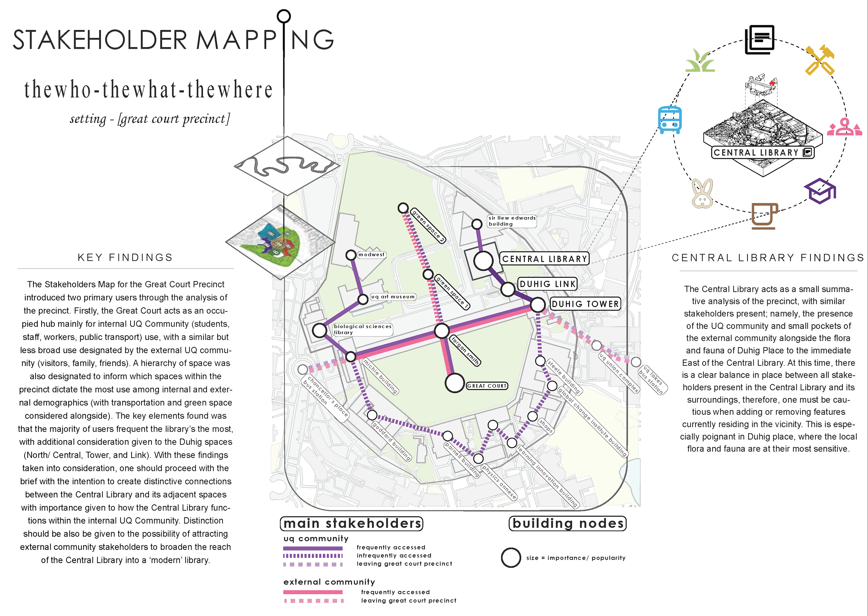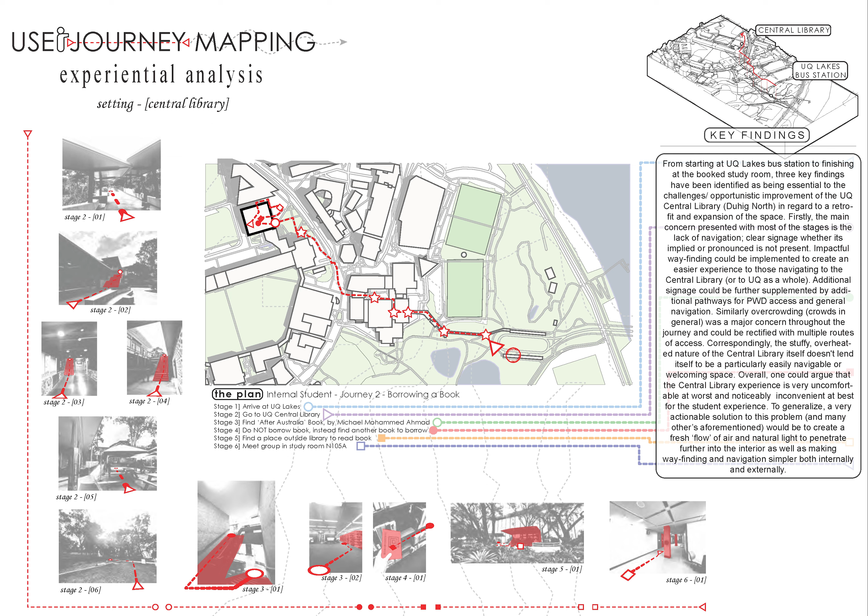To begin, I would be remiss to overlook the research I had conducted for the previous assessment piece involving 4 separate analysis pieces, whose findings will then help determine the new layout of the current assessment piece. Firstly, the analysis of the Great Court Precinct and its stakeholders through a mapping project was done to understand the primary user base of the Central Library and the nearby areas. A user journey map was also created to help understand the user experience of the site and current building layout. Tasks were given to be followed to meet an end goal with 3 other group members, with each of us giving a separate account of our experiences.

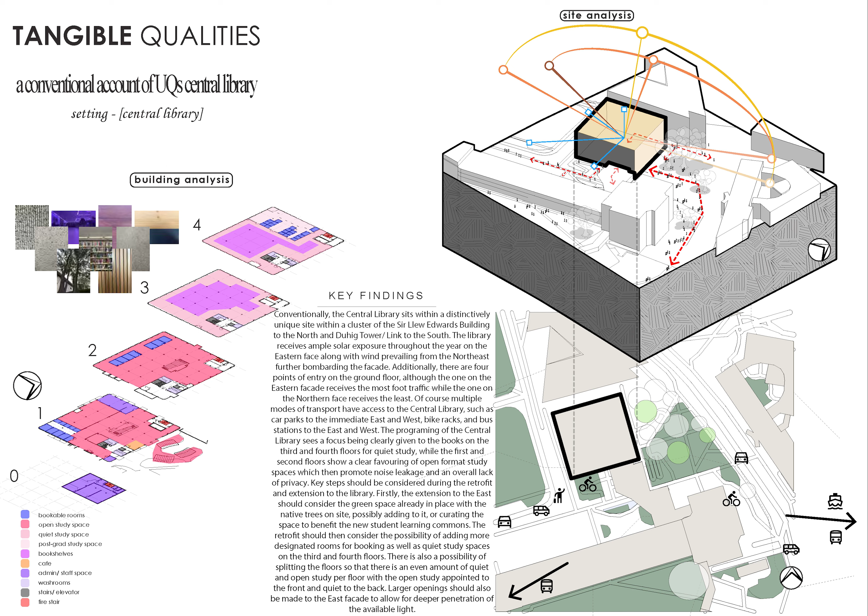Additionally, conventional building analysis was conducted, highlighting the use, materiality, and general orientation of the site and its surrounding environment. And intangible qualities were also considered, such as user experience and indirect environmental factors, such as the loss of navigation, comfort, views, and privacy. Summatively, I found that 6 key findings came from my research. For one, that the Central Library is lacking in natural light, positive user navigation, and open desk space. 2, Central Library must assert itself and maintain a connection to all of its users, both current and potential.

Number 3, levels 1 and 2 only fail to meet a general functionally user-compliant level due to having no overflow levels, which will be alleviated through the removal of the bookshelves in levels 3 and 4. There's little separation between single and group work areas, which leads into similar issues between private and public spaces. And the eastern facade receives large amounts of sunlight, yet this is not felt in the interior spaces. And finally, the far eastern floor of the building contains very few users, despite spaces being available.

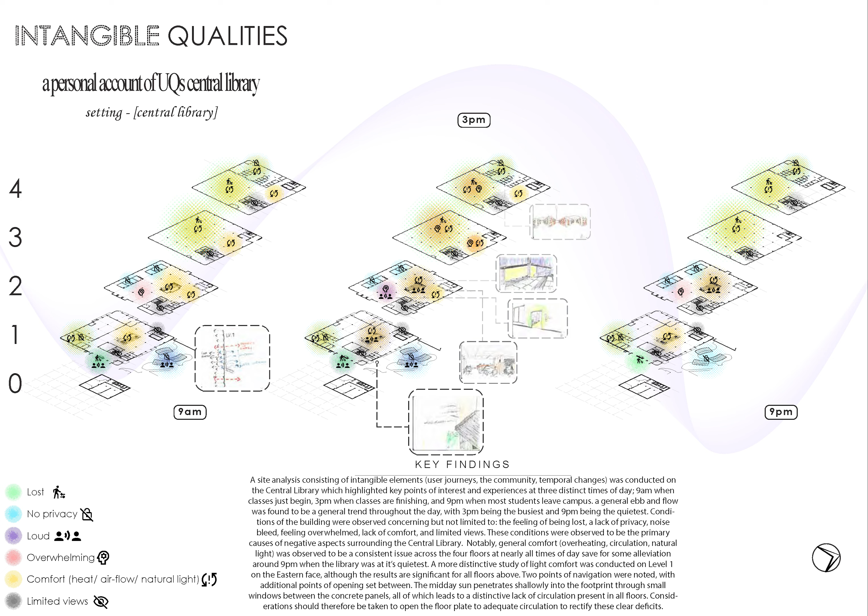During the initial brief, we were given these initial documents to consider and implement into our designs, which are to be utilized throughout both the first and second assessments. The key takeaways I found to be essential from each document that align with my proposal are Hassell's goals, being welcoming and inclusive, Campus on Country's open entries and clear wayfinding, Urbis' strategy number 3, which is the expression of legacy, and UQ's development plan to maintain and enhance connections. The goals of my proposal are therefore aimed towards enhancing the library experience through wayfinding, placemaking, equitability, centralization, distinct organization of spaces, and a porous gradient between adjacent spaces.

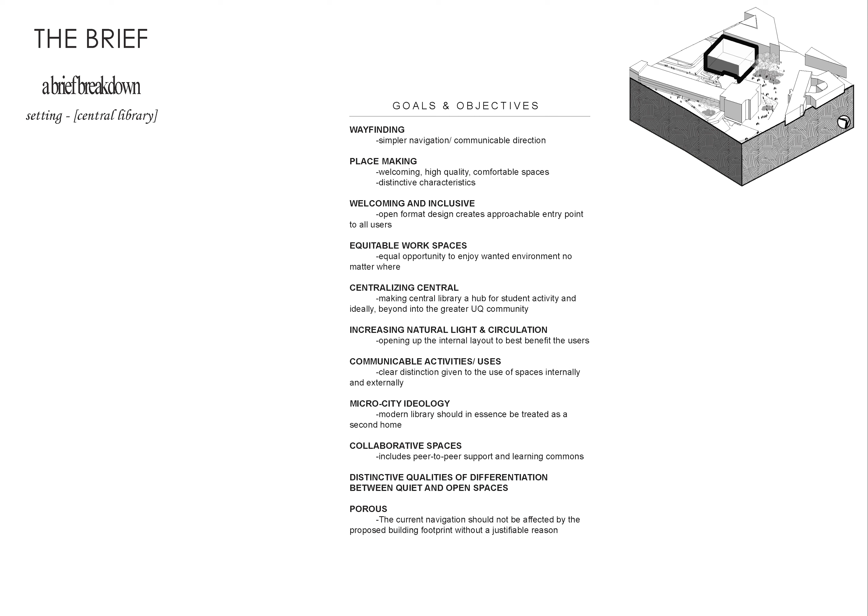Quickly looking over the program brief then, I've created a layout which can be translated both upwards and horizontally within a plane, with the distinction between the public and private realms remaining separate while remaining connected through either adjacency or function.

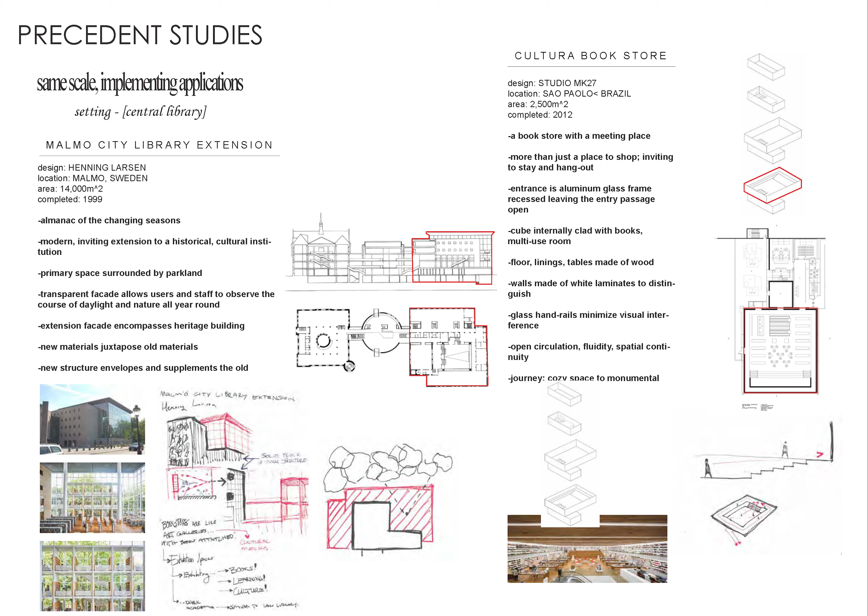Still remaining cognizant of the previous assessment, precedent studies and parti diagrams were developed and delved into to inform both the function of the space as well as the general shape of the extension and potential retrofit, all then culminating into the design concept of my proposal. Utilizing the removable precast concrete panels of the original library's eastern facade, I pushed them forwards into the site further east to create an opportunity for glazing to be added to the Central Library, a more welcoming and distinct entrance, and a new central wall within the proposed extension.

Additionally, 2 atriums were added to the Central Library to allow for better light penetration into the footprints, improve circulation across all floors, and to create a clear spatial and visual connection between the floors. Note the stepped gradient of the floors of the extension towards the adjacent road. Level 2 does not come out quite as far as the other floors. This is done to create a gradual entrance which beckons users inside while still allowing the overall building to maintain its proposed footprint, which asserts itself near the boundary.

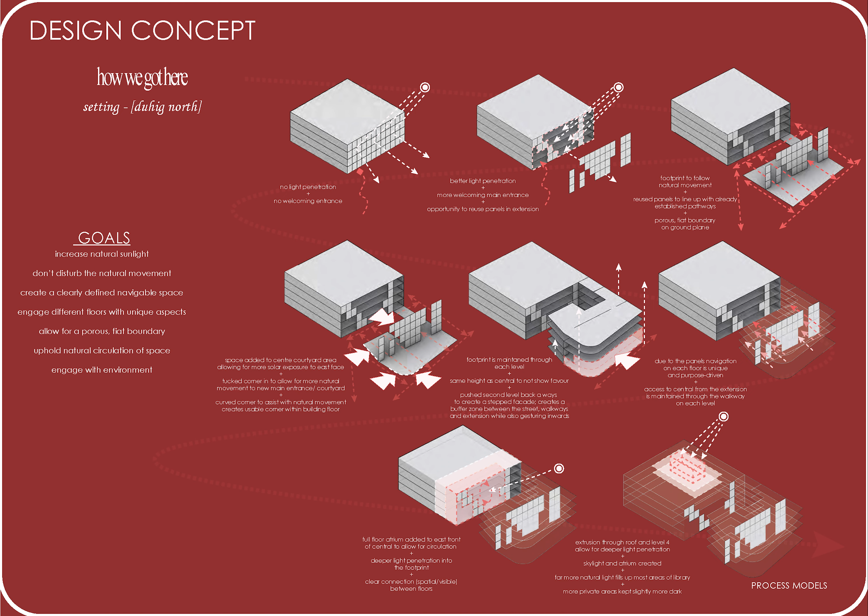This creates a buffer zone which proposes a rest area between the street and the access to the extension, which houses both a cafe and outdoor seating before pouring into the central courtyard and Central Library beyond. As a general overview of the site, and informed by the site analysis and design concept, the proposed extension acts in a 2-layered effect.

Firstly, the extension footprint is nestled against the pathways currently on site, not overstepping its presence. The extension aims to maintain and enhance the accustomed navigation of the site.

Secondly, the southwestern face of the footprint is pulled inwards for two considerable factors. Primarily to gesture patrons into the central courtyard, which features the digital screen plastered across the walkway between the central library and the extension, and secondly, to lead users into the now more clearly defined entrance.

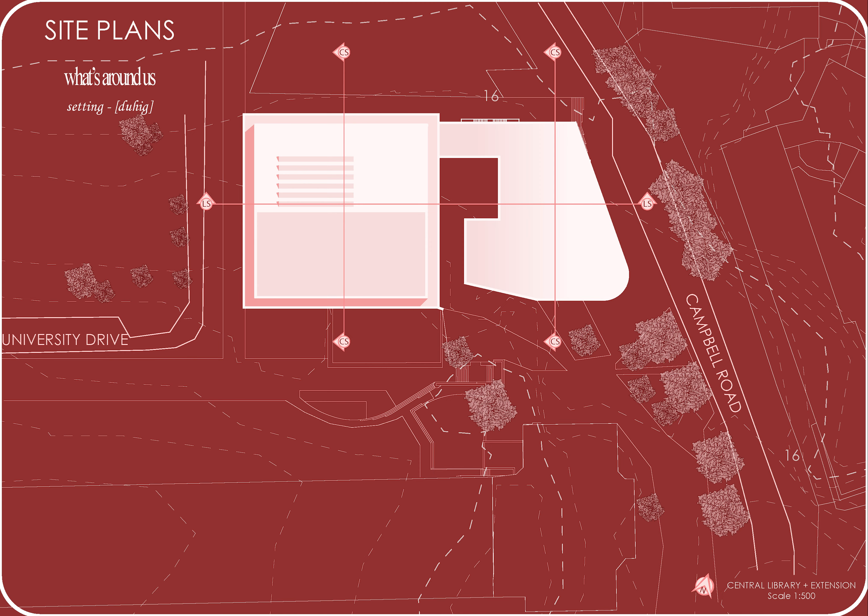And now, of course, I invite you all to join me as we embark on our journey across the proposed new central library. We first enter onto the site from the southeastern corner after a hearty lunch with friends at the Union Complex, of course, and are looking to find comfortable spots to set ourselves up for the rest of the day.

We just heard that the renovations had completed at the Central Library and are excited to see what the new building has to offer. Approaching the site, we immediately noticed the new extension. The extension is of equal size to the original library, which prevents one from overshadowing the other. The building's form ushers us towards the central courtyard, and the atrium space wrapped in the new glazing replaces the removed panels, revealing the glass elevator and new stairs connecting the floors.

We enter and immediately feel a gust of cold, conditioned air. We make our way past the staff desk and reveal that levels 1 and 2 are nearly identical. The floors did function perfectly well. It would be a shame to be rid of them.

All of the group areas are taken up, so we make our way towards the new extension from the connecting bridge between the buildings. As we make our way across, we notice that a large screen covers the windows of the facade, with a projector flashing a video across the screen to those sitting in the central courtyard.

Walking through the extension, we see the two video conferencing rooms, the kitchen, and the seminar rooms, which all seem to be in use. Making our way around towards the western side of the extension, we see a few available group areas to sit down in. The area is open to the air, and we take a second to collect ourselves. While it would be a perfect place to study, we want to explore the rest of the floors.

So we make our way up, using the new exterior stairs on the northern side of the extension. We always thought that Duhig Lane was an underutilized area, so having an integrated functional element present will inevitably help. Level 3 is completely changed.

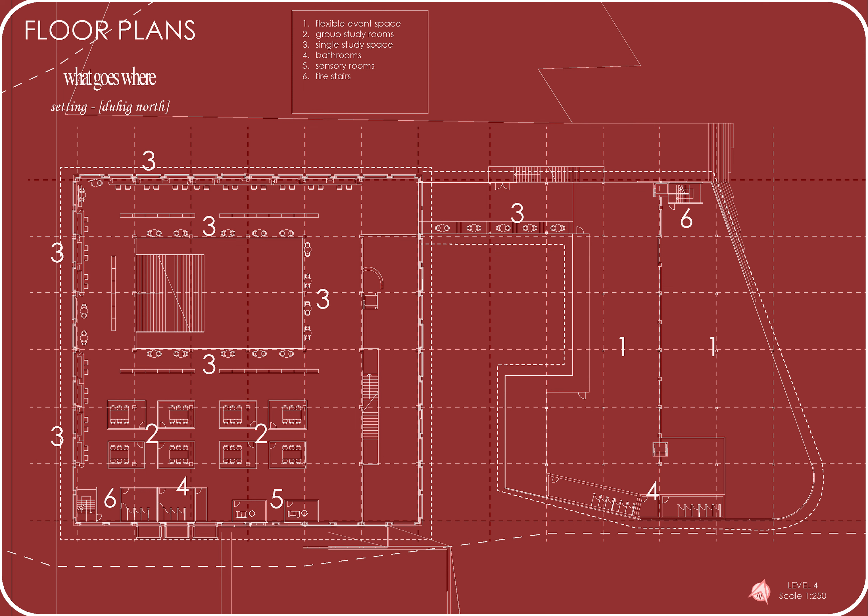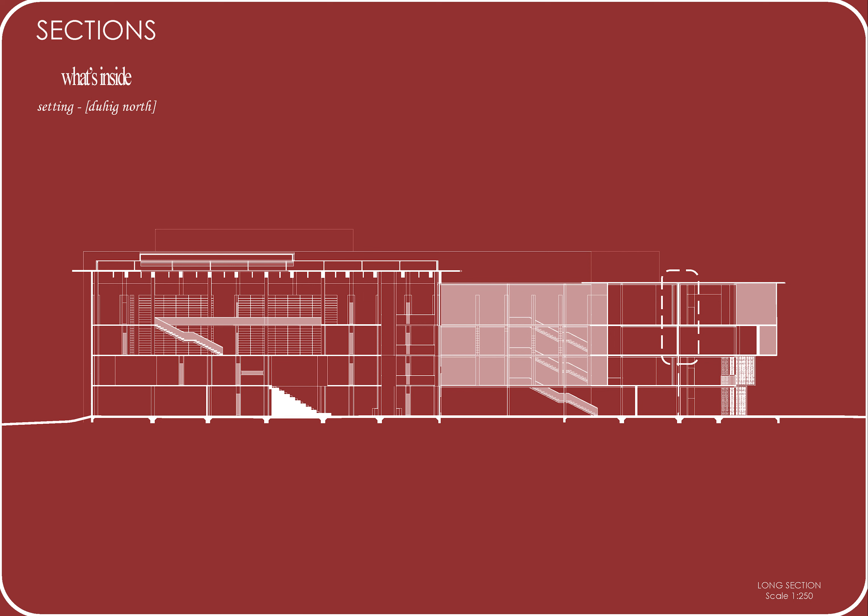Taking a step back now from our narrative towards the full scope of the proposal, I want to draw your attention to the orthogonal drawings produced, with important elements which I'll highlight throughout. To start, we will notice 5 important factors with the long section from the south: the two atrium spaces in the central library, and the sound baffling spread throughout the ceiling of level 4, the digital screen facade in the central courtyard highlighted in the glass of the connecting bridge, the call-out for the old precast panels and their new connections to the new steel structure, and the step facade of the extension towards Campbell Road to the east.

In our eastern section of the central library, we truly grasp the extent to which the atrium and the resulting skylight embed themselves into this design, with a sawtooth roof to accentuate the north-facing windows of the skylight to capture the ideal lighting to be diffused to the atrium below. All these propositions will be much clearer in the sectional perspectives presented later.

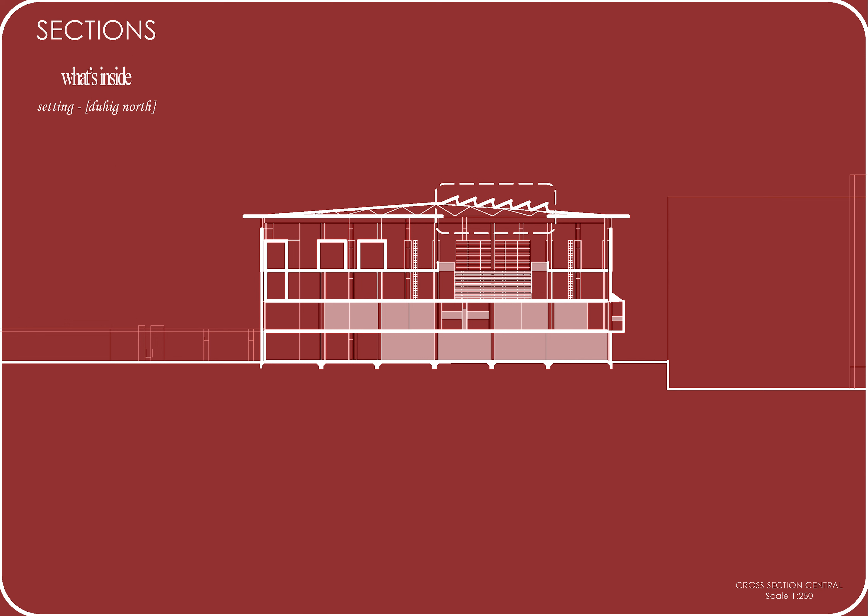The extension is then seen to be peeling back from the layers of the old central library and revealing the new materials beneath. Think like going from hard to somewhat dense to light and fragile. This can be seen better in the following elevations.

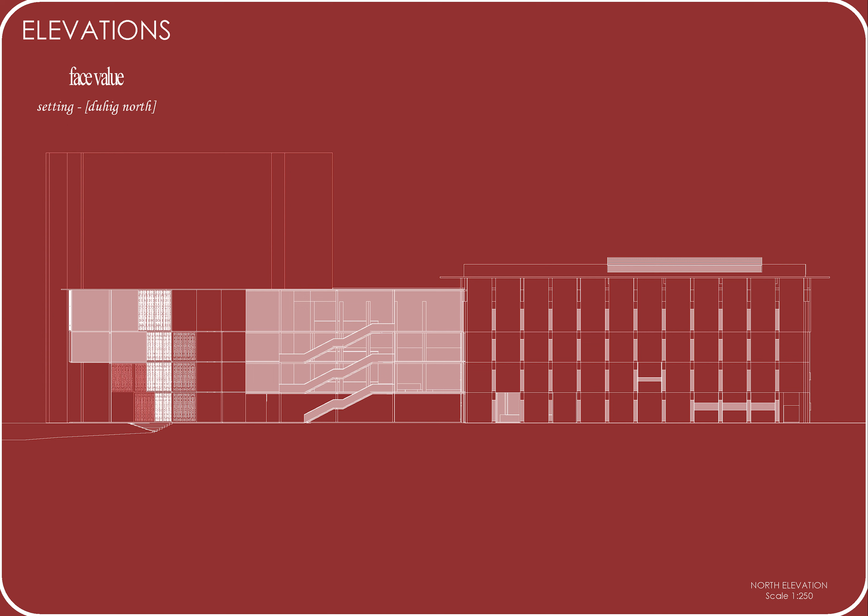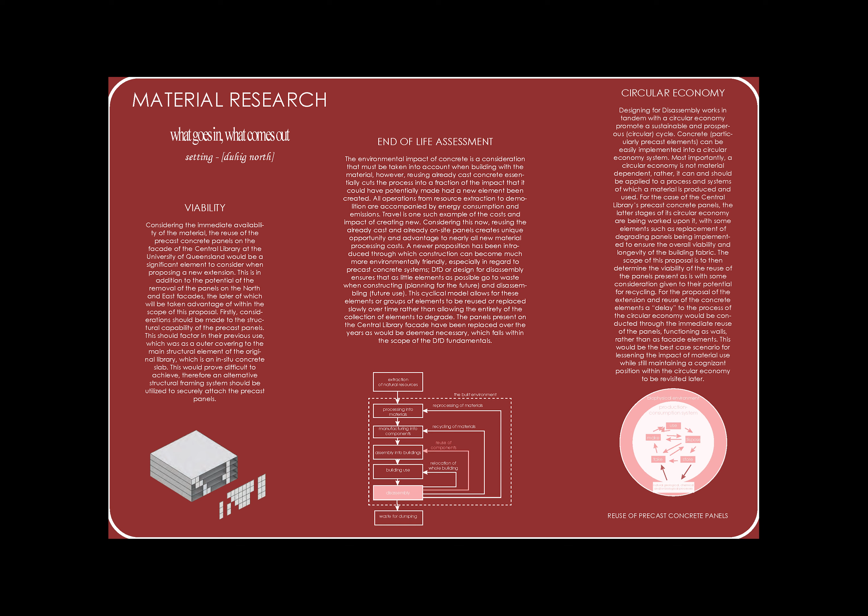And to generalize, my material research was focused on the reuse of the precast concrete panels on the Central Library facade. This would then imply that we are not producing material, meaning the emissions from the production have already occurred, which were still present, and steep costs towards the GWP of itself during its production. However, by utilizing the potential for these panels to be reused not only by this proposal, but by other projects in the future, the hope is to begin the conversation around the circular economy of concrete and its potential to be reused and refitted nearly indefinitely.

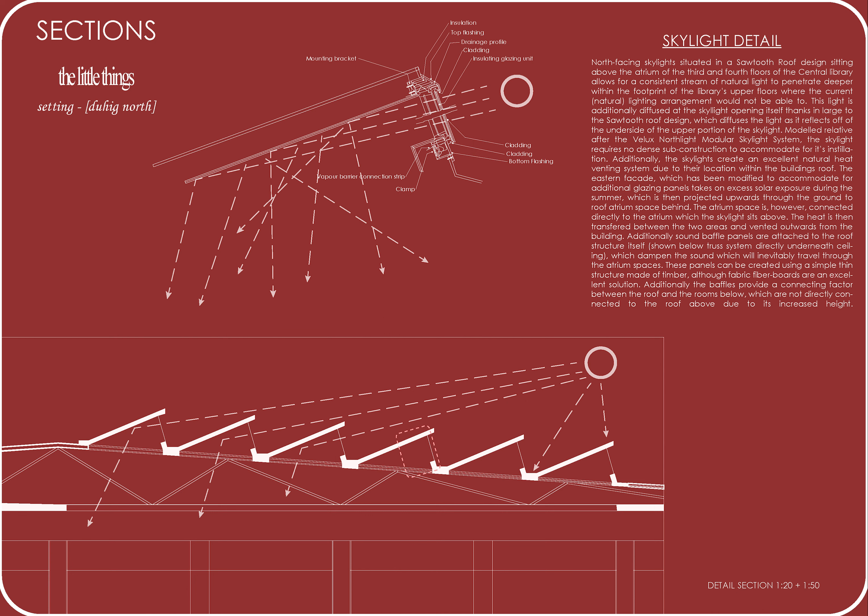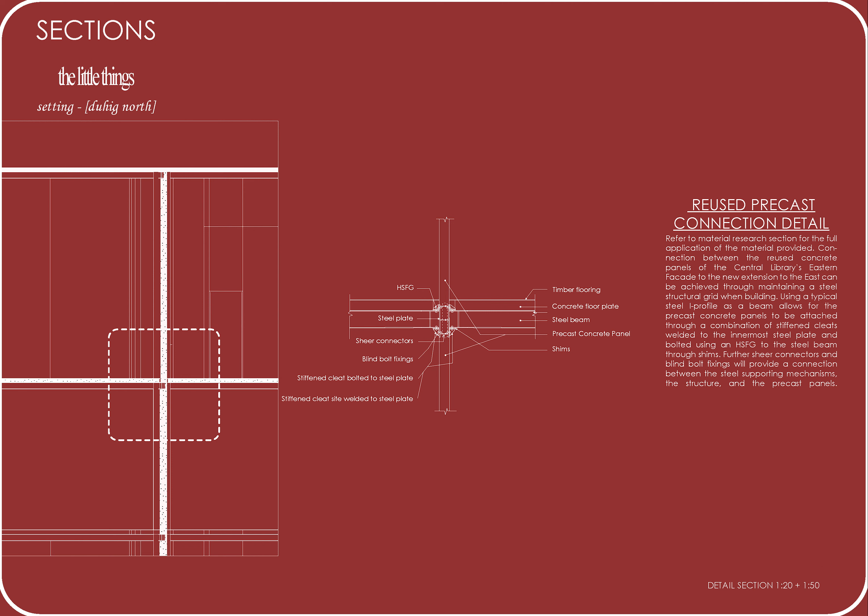Being one of the most important features of the atrium of the proposal, the skylight system proposed will be equivalent to the Velux Northlight modular skylight system, which takes advantage of the northern light to diffuse the light throughout the space below, while also not requiring any major subconstruction, which allows for it to be placed on any sloped roof. I also made sure to detail the connections between the old reused precast panels and the steel structure of the new extension, notably taking advantage of bolted connections on the major structural elements to allow for reusability later due to the difficulty of reusing welded steel elements.

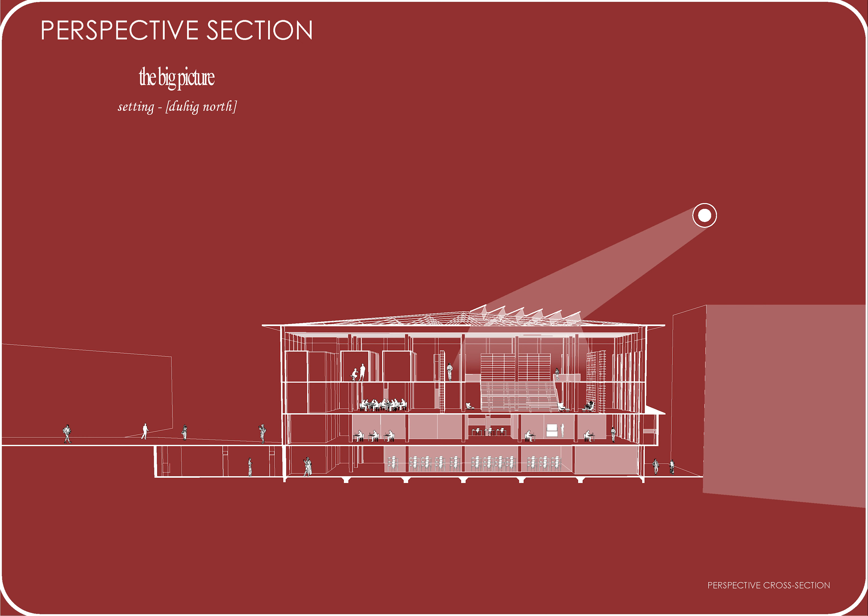The cross section of the central library showcases the potential of the skylight into the atrium space, as well as the extent of the sound baffles, which can be outfitted with lighting to maintain a consistent light profile of the ceiling during the evening. Notice the rooms as well of the fourth level. They refrain from reaching from floor to ceiling for two reasons: for the allowance of a buffer between the roof and the floor below, as well as a clear space for circulation and sound to travel throughout towards the baffles.